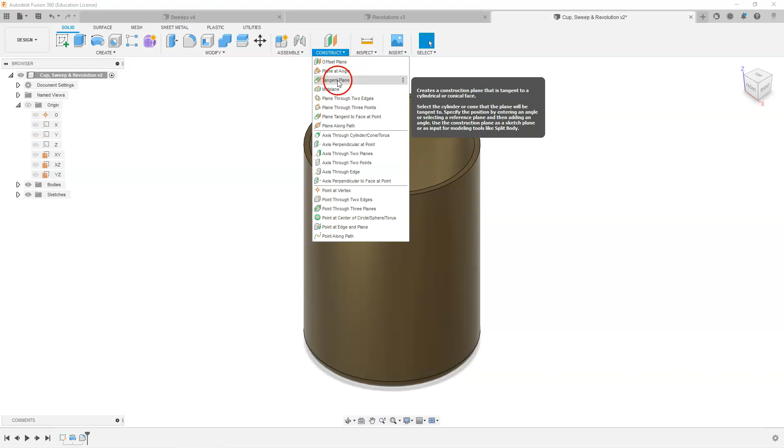So what we're going to do first is create a plane using Construct, and we want a tangent plane. If we select the outside, we're going to have a gap in our handle - I'll explain that later. So we actually want to select the inside circle. It's not really critical what angle you select here; as long as we have a plane to sketch on, we can select whatever we want. We could select 90 degrees - that's going to be fine. So we'll select OK.

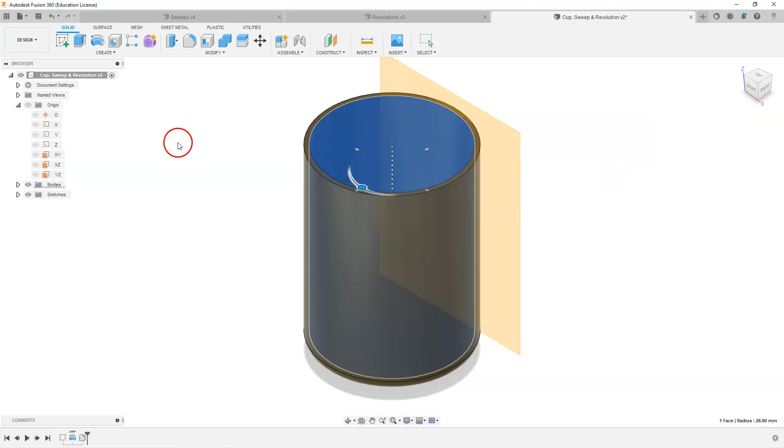And now we're going to sketch. We've made our first revolution on the origin point, so we can use the default axis here to sketch on, which would be this axis. So we are sketching on this plane here.

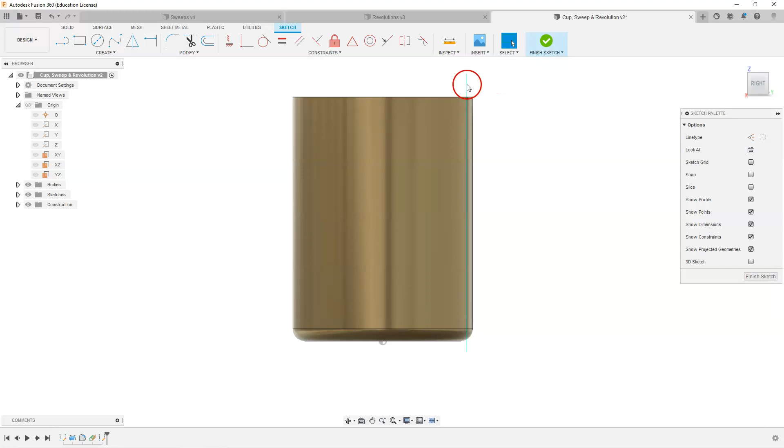Now we want to create a path. We do have this plane here, so we're going to use that as a reference. We're going to use P for project, and select that so we can use it when creating our profile. So we'll start off by sketching a fairly rough profile, and we can constrain that after, and we are going to create some fillets in there.

So we'll create a fillet between there and there, there and there, and a radius of 5 is good. We'll accept that radius of 5, and now we want to add some other constraints in here to make sure it is fully constrained.

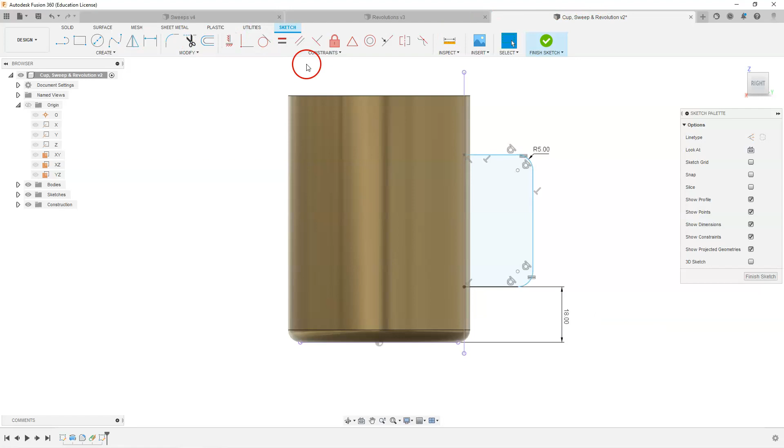So we're going to put a vertical dimension in here, and we'll put that at 18 millimeters. If we're wondering what still needs to be constrained, because we have blue lines and not solid black lines, we could click on this and drag it around to see what's happening, and we know we have to constrain it vertically and horizontally.

So we're going to add some additional dimensions. First, put on a vertical dimension, and we'll put a dimension of 42 in there. Now we just need our horizontal dimension - we could select this as well, but we might also want to project the outside edge, or we could use a center axis. We want to constrain this horizontally one way, so we'll select from the inside plane there and that dimension, and put 22 on there.

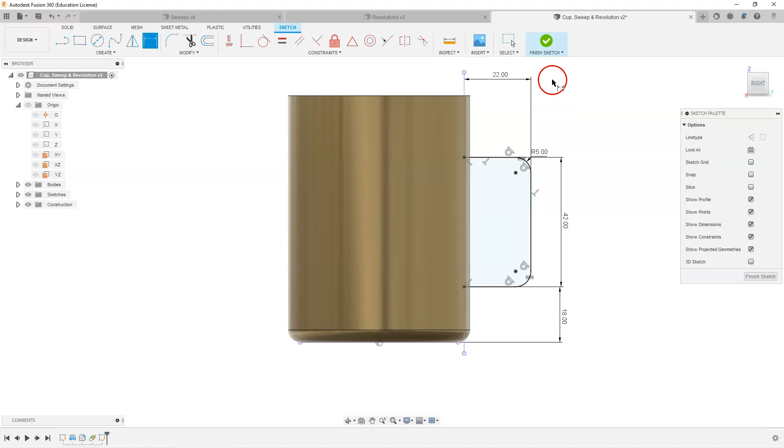So now we have a fully constrained profile or path. Now that we have our path, we are going to select our profile that we want on there. We can actually select this plane - we don't have to use the construct plane through along a path, but we could. We don't need to in this case because we know our path is right on that plane that we created.

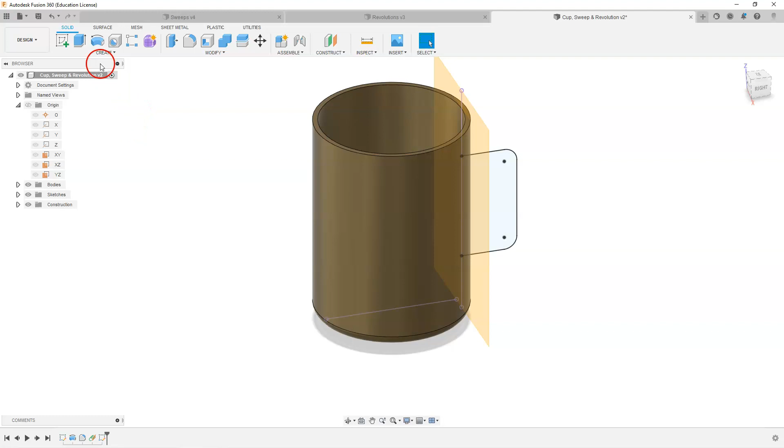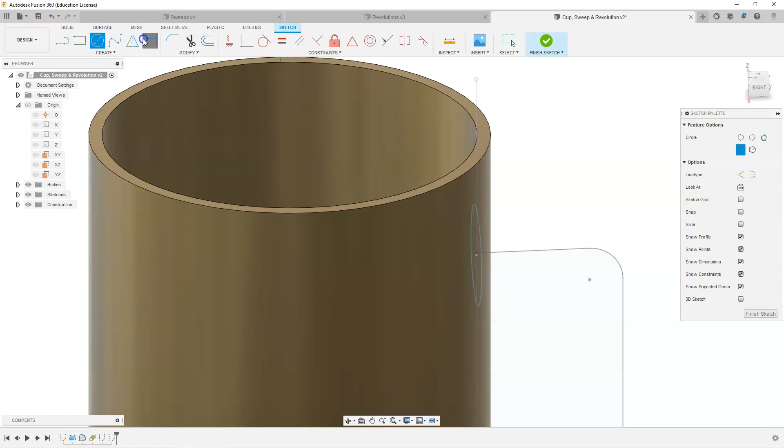So from there, we're going to create our profile - select Create Sketch and sketch on this plane. Now we're going to create our profile sketch. We might want to change the orientation so we know exactly where we're sketching. I'm going to select that center point, and put a dimension of 5 millimeters on there. We can look at that view this way to see what it looks like - we know we have a diameter of 5.

Just going back to our isometric view so we can see what we've got. So we have our path and we have our profile.

If for some reason you do have a problem seeing through the material when you're creating your sketch, we can actually create a section through here.

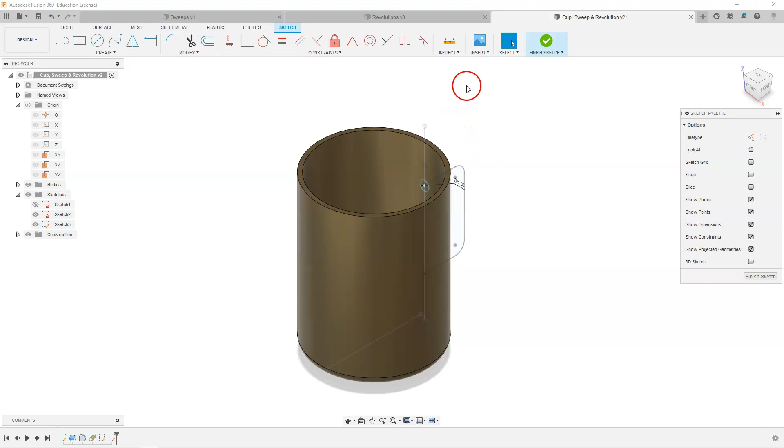So we're going to go up to our inspect tool, select section analysis. And when we select that, it's going to ask us for a plane to select. I want to cut it halfway from this point through this point, just like we're cutting it with a saw. So I'm going to select that plane. That would be the direction that the saw would be going.

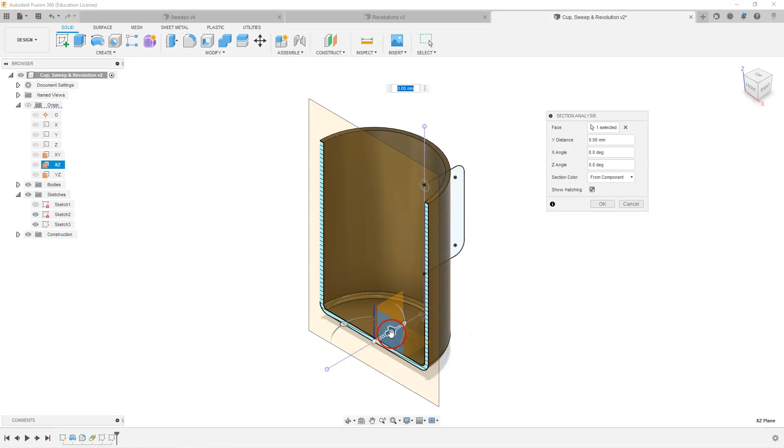When I select that plane, you can see a section cut through the cup occurs, and we can drag that anywhere we want. If that is fine, we could go look at our view and sketch our circle. You may be able to see it better that way. So just going to select OK and finish our sketch.

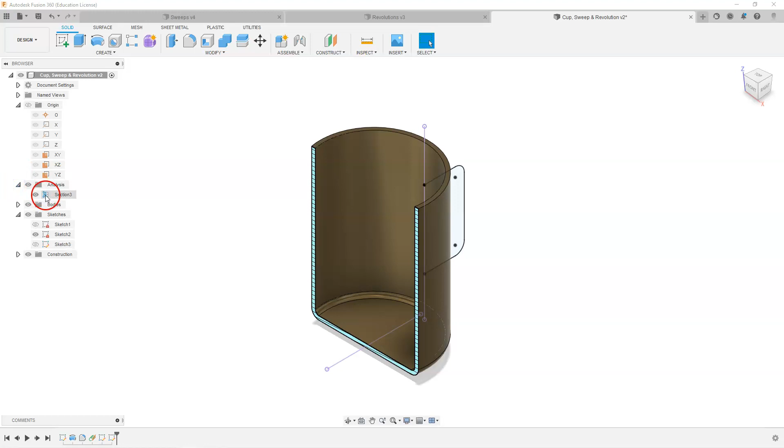If we do want to eliminate or delete that section that we've created, we can go up to our analysis here, and if we expand this, we're going to see our section that we created in there. We can just right click and select delete.

So now we want to go through, we want to add our sweep in there because we do have our profile and we do have our path. So we go up to create and we're going to select sweep. Make sure this is single path. Our profile is our round circle we created, and now we're going to select our path.

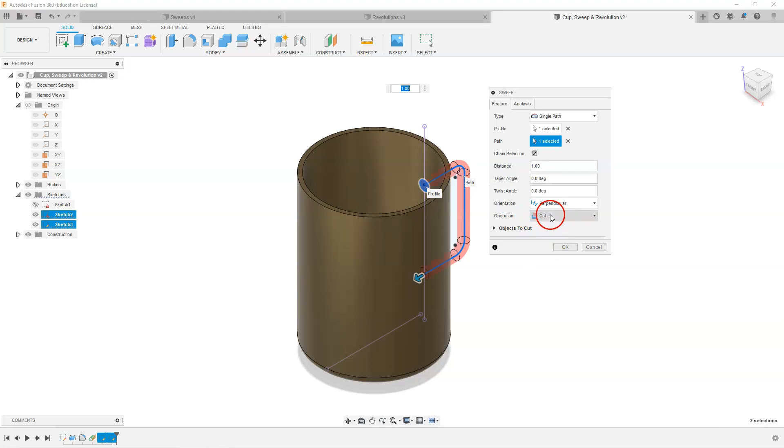There is our sketch path that we created, and we don't want it to be a cut, so we want to make sure that this is a join, and we don't really need a new body on there, so just leave it at join, select OK, and we can turn off these sketches, and now we can see our new cup.

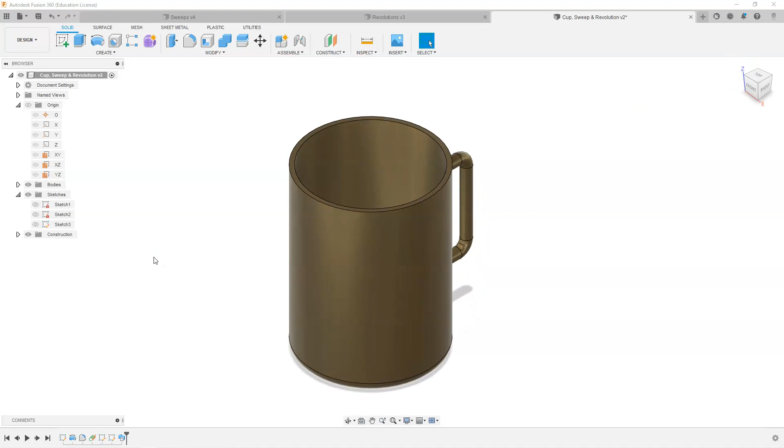The last addition I'm going to add to this is a logo. So you can select whatever logo of your choice. I'm going to add a Nike logo to this, and I've downloaded a Nike logo that I found on the internet, but a lot of JPEGs or images that you have will have a background on them.

If you don't have Photoshop skills and you want to remove the background, there is a website that is free, and you can just drag your file into there and it will remove the background and create a .png file, which is a transparent background file.

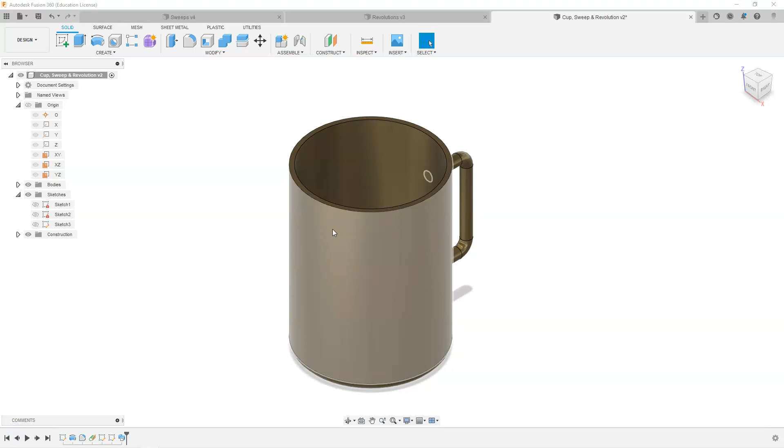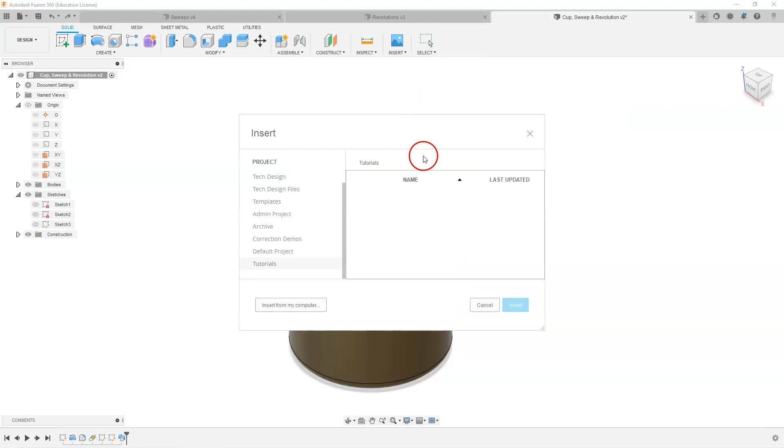Now that my file is downloaded, I'm going to go up to my insert menu up here, and I'm going to select decal. And when my dialog box pops up, I'm going to select insert from my computer, and that will take me, I want to make sure I grab the PNG file, not my logo file. Select my PNG file, and you will see it's asking me for a face to place that on.

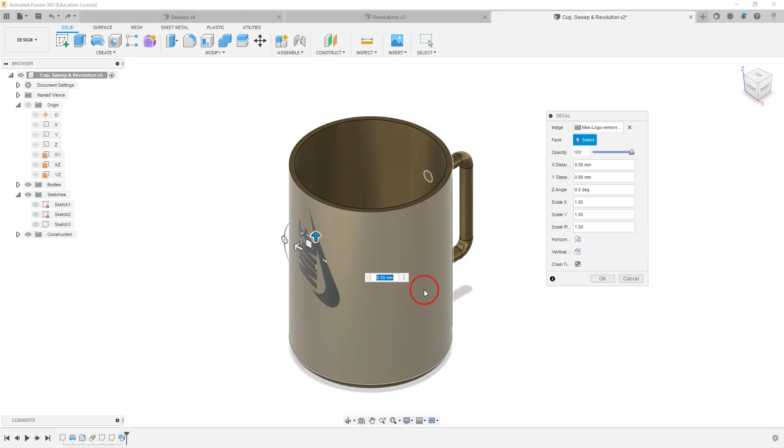So I want to place it on this face here, and give it a second. It will appear, and now I can make some modifications to that. So I can scale that, move it. These little lines here are the scale, and I can also rotate that.

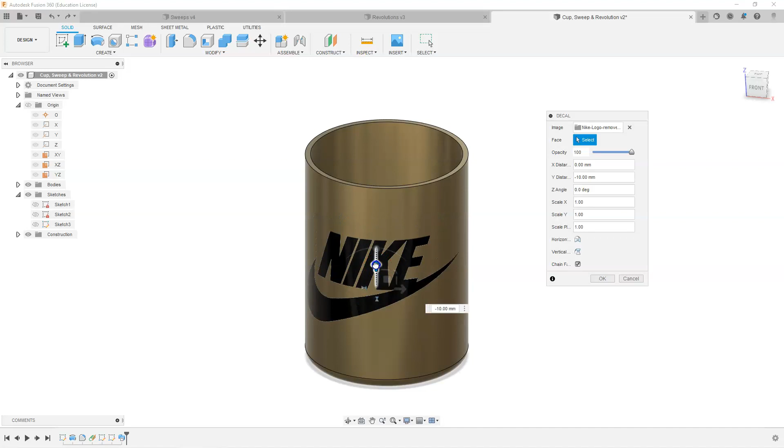So I'm going to rotate that 90 degrees, and I'm going to scale this up just a bit and make some adjustments in moving this. Maybe put it in the center, scale down a bit, and that looks good to me. I can also change the controls through here, do some scaling, rotating, flipping, etc. And I am done with that, I think.

So I'm going to select OK. And that is inserted there, back to my isometric view. So I have my Nike logo now added to my cup. And you can add any image file that you have, any JPEG file. But if you want to remove the backgrounds, you want to select something simple.

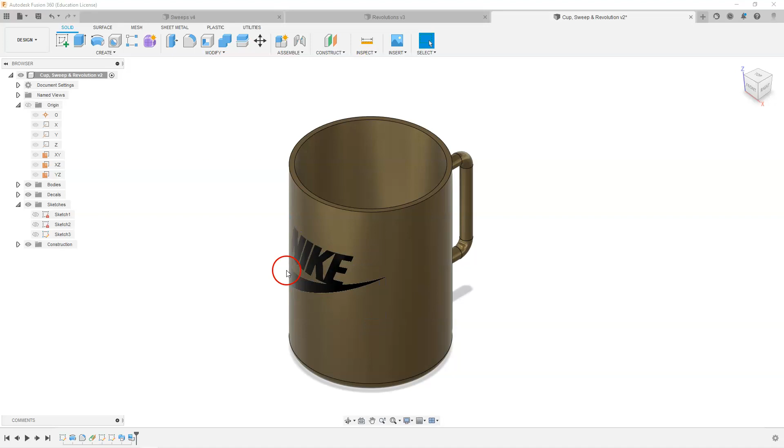The next thing I want to show is just how to get a little better image on this using some rendering techniques, just to make it look a little more realistic. I've already got my material selected. I'm satisfied, I think this is a polished bronze or something. I'm going to go up to my design menu there, and I'm going to change that to render.

And a new menu is going to pop up there. I already have one render done on here, but we can make some adjustments. Under our setup, we can change our material or appearance. We can do that in here, or we can change our scene settings.

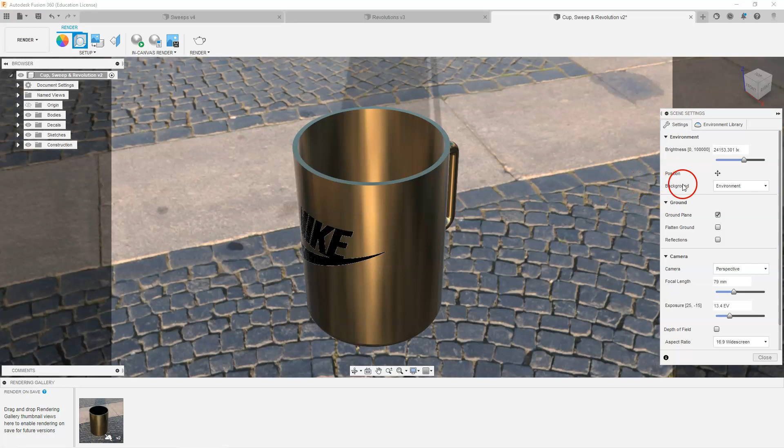And in our scene settings, we have some options in here. You can just click on some of these to see what the changes will be. We can add reflections, we can change our perspective, our focal length, and these are all camera terminology. Our exposure levels, we can make some adjustments to that. But it is based on our original view that we started with.

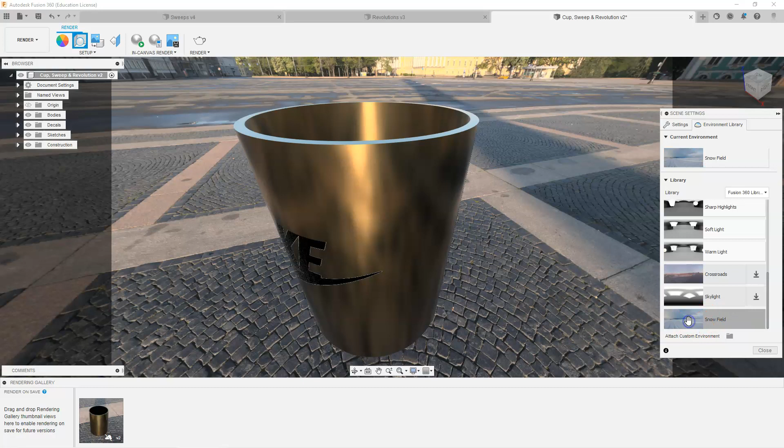So we might want to go back and change our view and rotate that a bit so we could see that. And under here, environment library, we can select a different library, and some of these may need to be downloaded. Say, for instance, we wanted to select this snow field, I would download that and double click on there. The snow field shows up here now.

And if I go back, it'll take a second. Doesn't look too snowy there. I might have to change some other settings on here, maybe my focal length. Change my focal length a bit. And I have some other options on there.

And then once I am done with all that, I'm satisfied with my environments on here and all my settings, I'm just going to go up and select my render. So we can do an in-canvas render, it's just going to render it right here in the scene. We can expand that, change our render settings, and then we can capture that image.

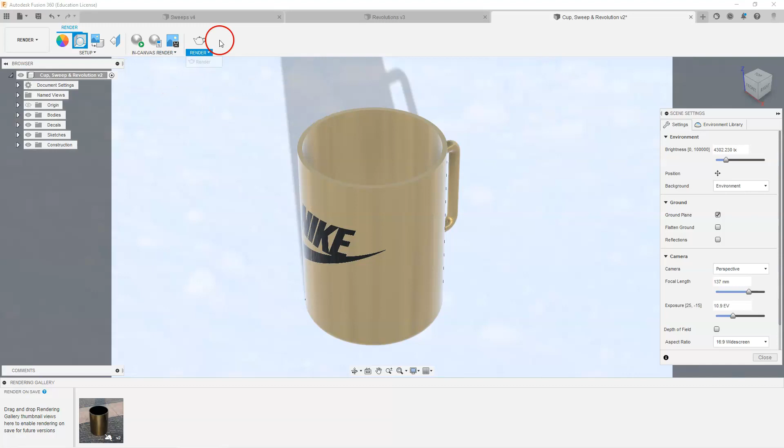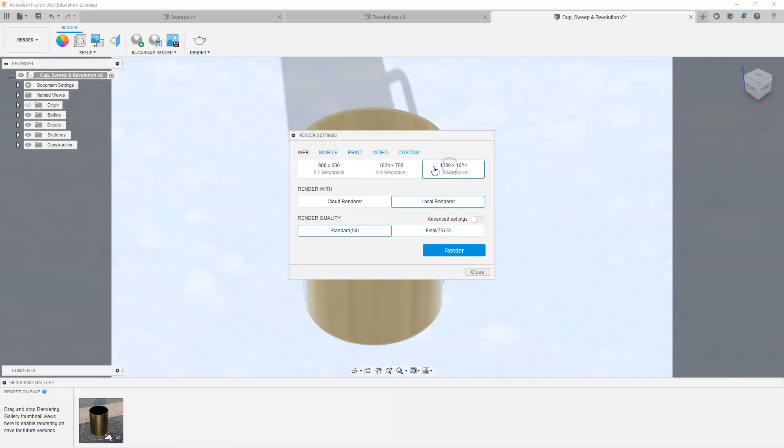For this, I'm just going to select this render. And when we do select that render command, we have some options here, customize our sizes, our pixel sizes. I'm going to go with web because it's going to be smaller, and I have some different options here. So I'll pick 1280 by 1024, and cloud render you might want to select if you have a slow PC. Mine's not too bad, so I'm going to select local render, and this is my quality, standard and final. I'll select final, and as soon as I select render, this will pop up.

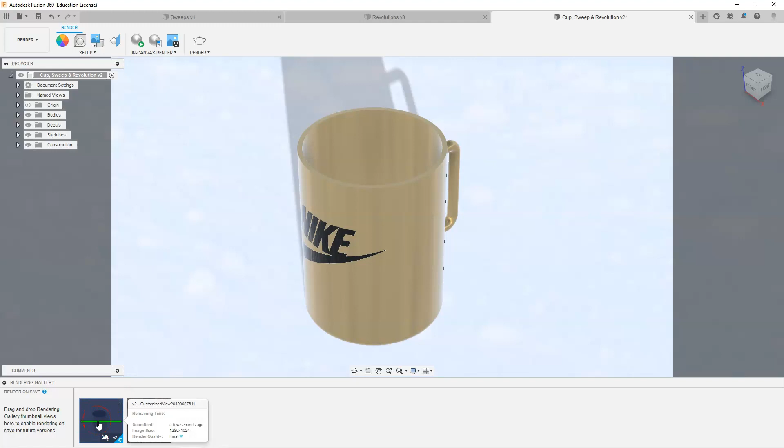It says it's started, and we're going to wait for that to complete rendering, and you'll see an additional icon pop up here that tells me I submitted it a few seconds ago and my remaining time. Once that is done, I can click on that image. My render is now complete. I can look at this image by clicking on that image down there, and I do have the option to download that or delete that file.

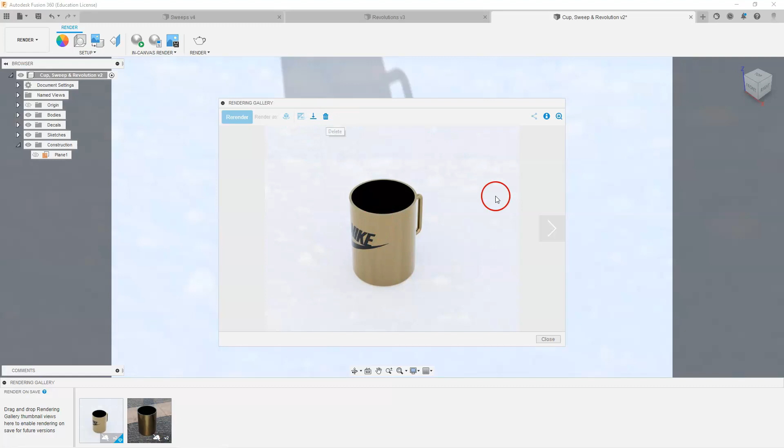Just one last thing, if you were trying to look at a different view, you can use your standard zoom commands and rotate commands that you use in Fusion. So you can grab the angle that you like, and you could do another render.

That's the end of this video. Hopefully you've enjoyed it, and hopefully you've learned how to do some revolutions and sweeps and adding decals and some rendering.